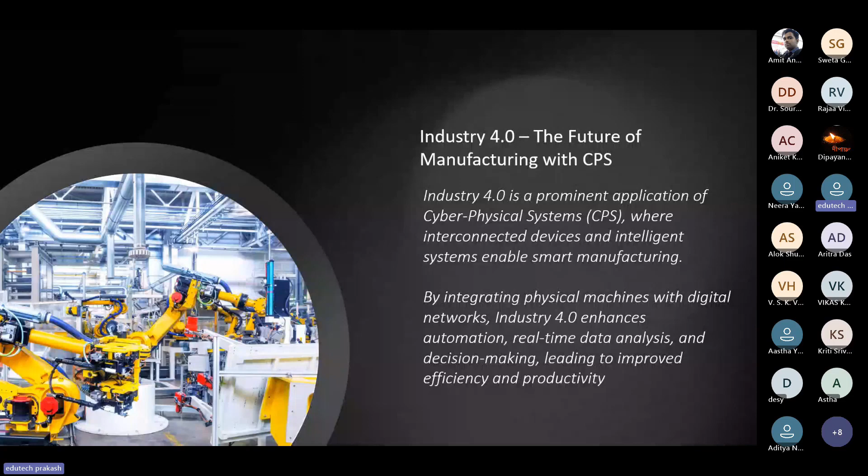So I'll slowly touch on different types of robots and how you can do research on CPS, what concepts you can cover. As I told you, I am from EduTech, and we are also offering the CPS lab where we will help you set up hardware like a mobile robot, a robotic arm, or a self-driving car, indoor or outdoor, and also the drone, aerial autonomous vehicle. I'm going to touch upon research closely with our components, because we're also doing research with some institutes, and we offer this lab to all IITs, NITs, and Tier 1 institutes.

So first, we cover the computation part, or we can say think. When we talk about computation in the first application, smart factory, one key robot in that smart factory is the robotic arm. In the robotic arm, we need to do sensing, meaning you need sensors to see and understand things, or we can say think.

In this video, you can see the robotic arm and its digital twin. Both the digital twin and the real hardware are synced to each other, meaning all the joints and encoders can collect data and send it to the cloud. From the cloud, you can receive it on other devices and replicate the same thing in the digital space. Parallelly, on the left side, you can see the robotic arm with the RGBD camera, where you get RGB color image and the depth image.

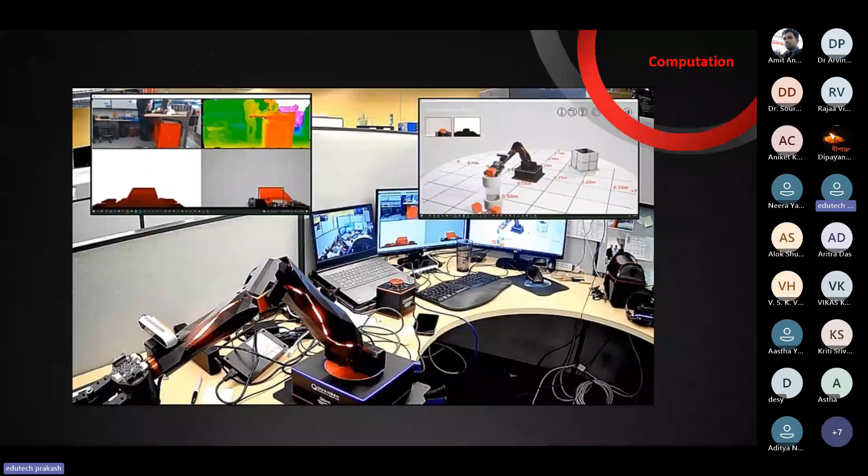Next time I need to do object segmentation. In this case, one object will be a circle and the other will be a square. For this, OCR is not suitable. You need a different algorithm to identify this, converting the color image to black and white, then edge detection, and from that you do some calculations. Only then can it identify whether the object is a square or circle.

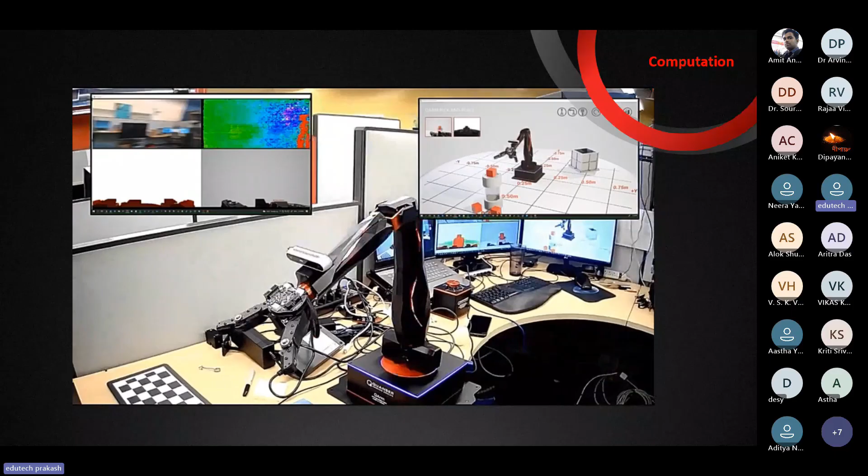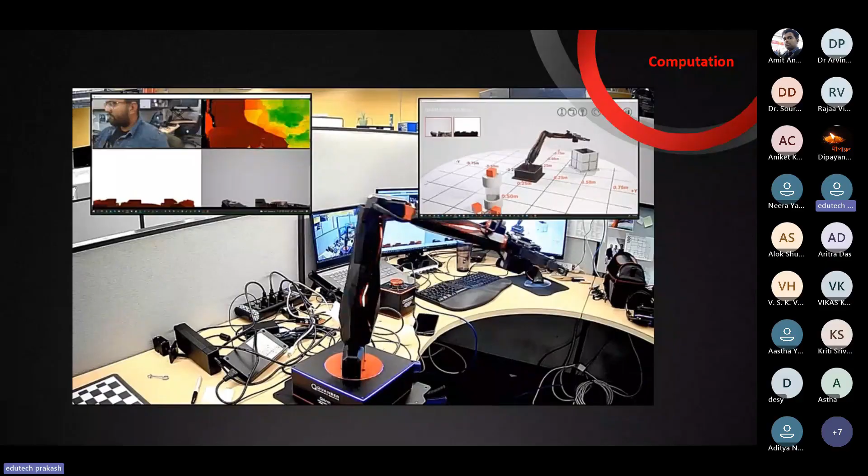Using histogram data, you need to do all the calculations manually. But with an AI algorithm, the same DNN algorithm can be used for different types of samples. Today it's just boxes, tomorrow it may be a vehicle, a car. For example, you need to fix the nut and bolt in the seat, so the same algorithm can be used.

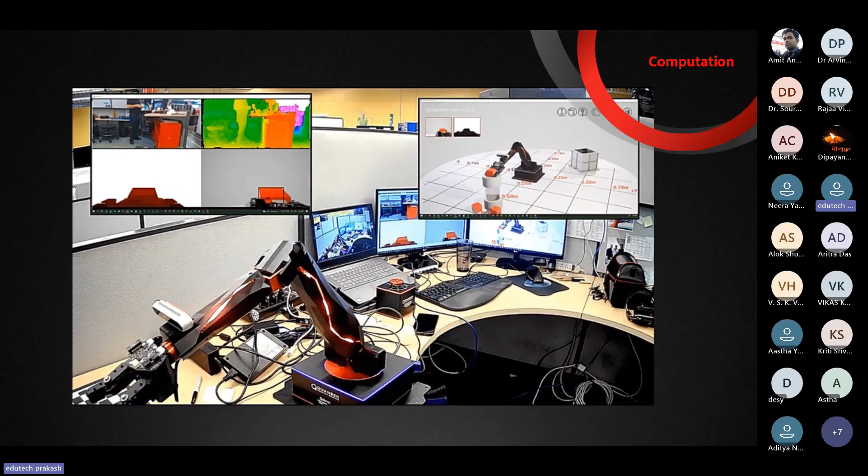That's how people are evolving their technology in the industries. Mostly the algorithm will be similar, so a small configuration is required instead of swapping the entire program.

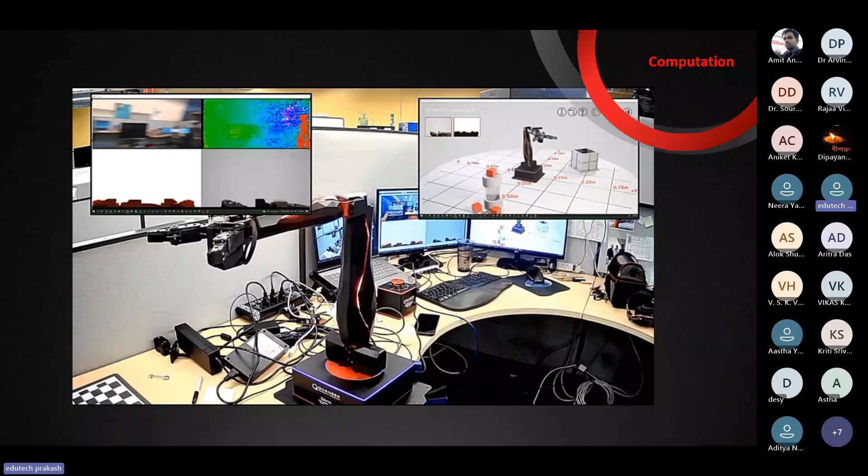As in the previous example with the robotic arm, this time it's a drone. In a warehouse, the drone is used for surveillance and data logging. It will go to the warehouse storage area and scan all the labels. It can pass the data to the cloud, and you can track all in and out activities, monitoring them through the drone. So for this case, how can you do the research?

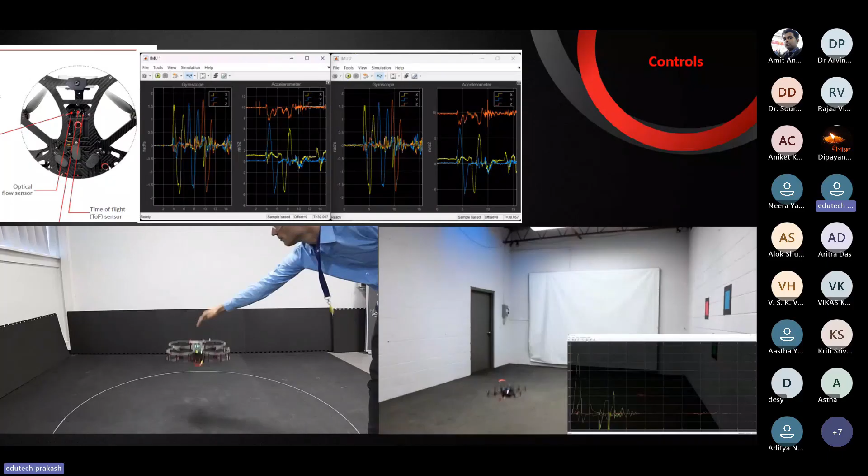This is one example of external noise made by a human, or even in MATLAB Simulink you can simulate noises like environmental disturbances. You can use the environmental model to give a disturbance like wind or other disturbances - you can give that option.

On the right side, you can see the stability - what level of stability we can achieve. So we are going to do a backflip, not only one time - we are going to do triple or four times backflip within 5 seconds. In this video you can see this. This level of stability you can achieve with our solution.

If you're doing research on controls, the concepts you can cover include starting from the basic mathematical model of the devices, and the motor model. From there you can identify the suitable parameters for the control, and you can change the control algorithm - it may be feed forward, feedback, PID, LQR, state feedback control, whatever it may be. You can change the algorithm and validate it.

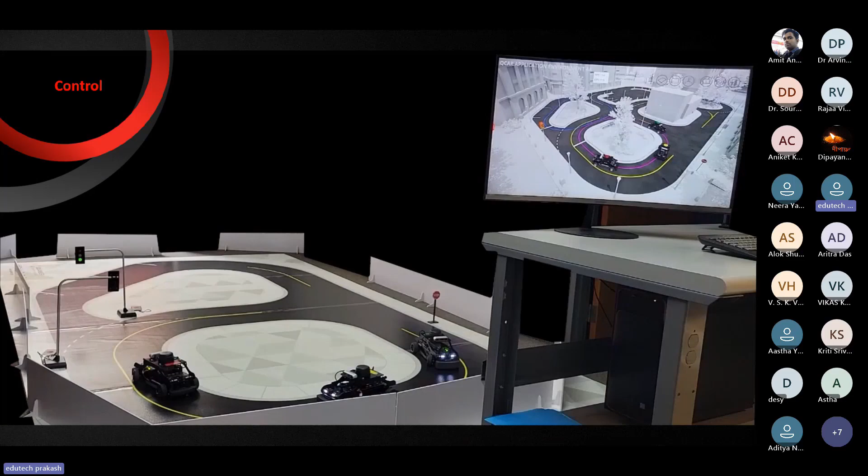And also the indoor 1/10 car - here we are, this is the car, with a smart map. Here you can see the smart traffic light. It can detect the traffic and it will open up the particular lane. Like if there is heavy traffic on one lane, it will open that lane and close the remaining lanes.

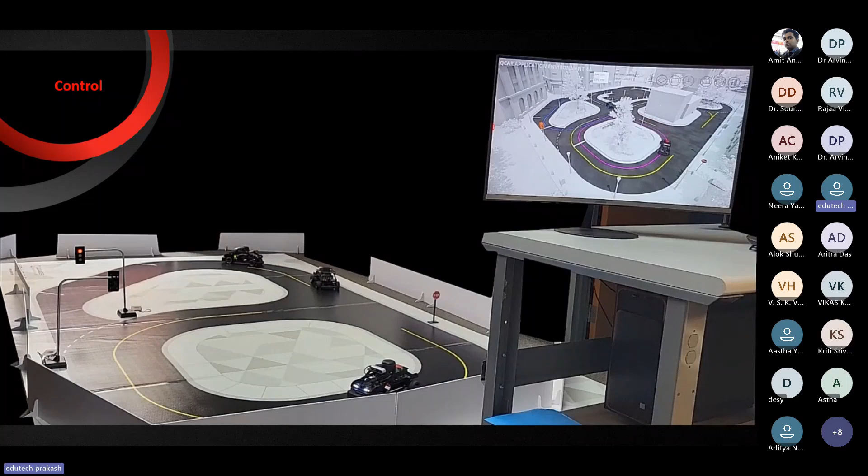This is the smart infrastructure, where all devices and all cars can communicate with each other. Each car knows the current location of itself and the remaining cars. Similarly, the traffic light also knows all the data - if there are four cars, it knows all four car locations nearby, and depending on that it will open up the traffic light. On the right side you can see the digital twin.

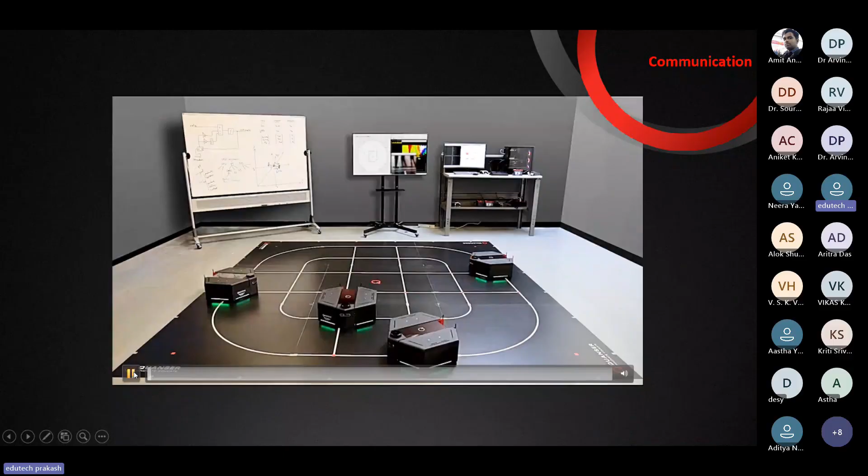And the final part, we already completed the computation controls. Now it's communication. When we talk about communication, this is one example where industrial robots and warehouse robots should navigate multiple obstacles, and all devices should be connected internally, either as a mesh, centralized, or decentralized.

You need to communicate all the data. If there is an obstacle, if you're going to apply brake, you need to share this data - what is your current status, your bot and the remaining bot - the way you can develop the algorithm for the communication.

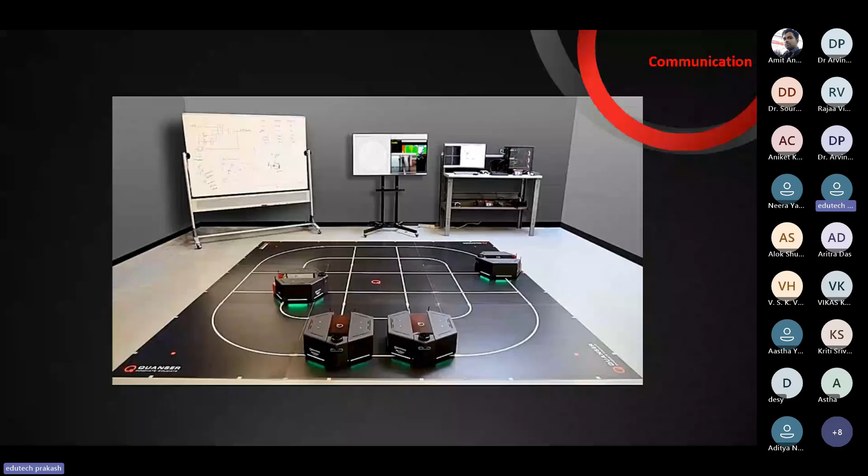This is for the mobile robot, and this is for the drone. With our drone, you can do this swarm intelligence, like all four drones can do a single operation with the same trajectory.

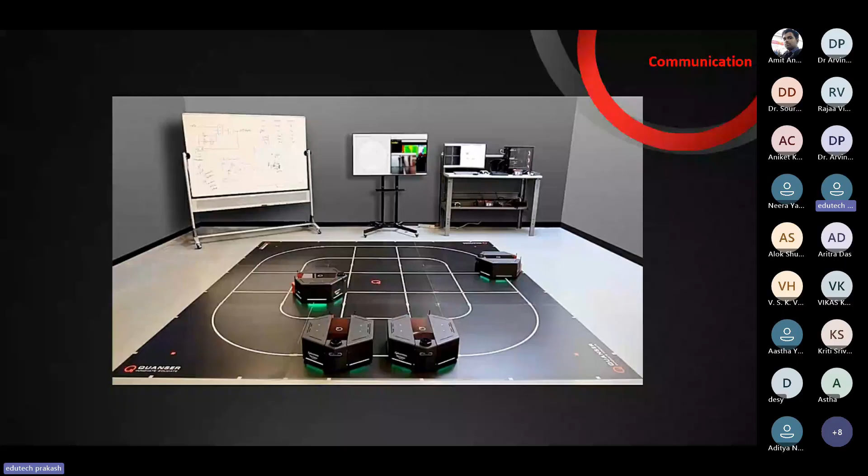This means it is not manually controlling. All drones are automated. In real time, they can do that computation, they can do controls, and finally they can do the communication. And this is for the architecture.

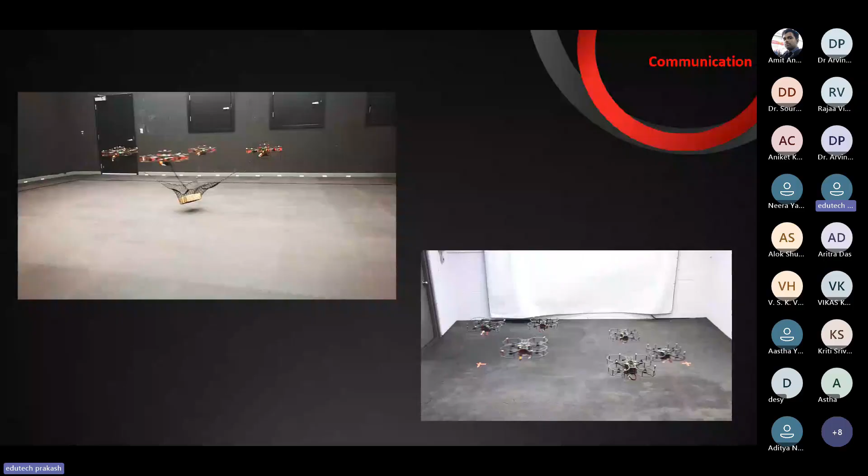At the same time, you can do both manual control and object tracking, and this is how the data communication works. Each drone has its own stabilizer with the NVIDIA board, and all devices are connected through the same Wi-Fi network.

So from my ground station, my laptop, I can pass the waypoint so that all drones can follow my trajectory.

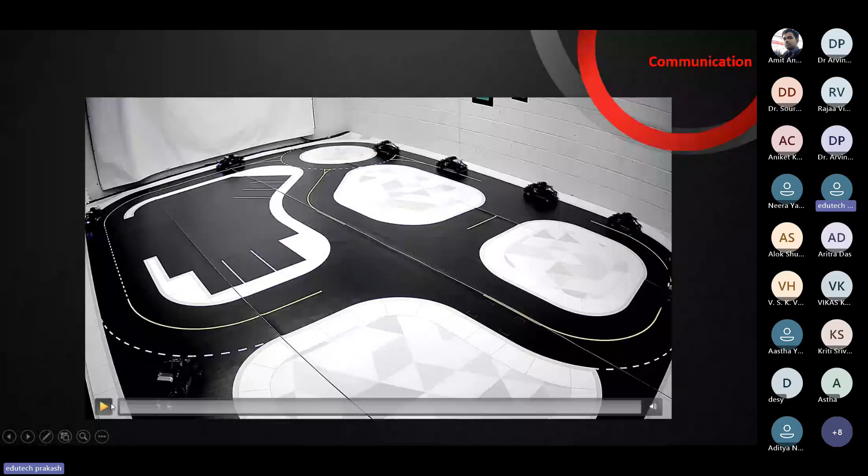Similar to the drone or mobile robot, what will happen if we run 10 smart cars? When people talk about autonomous trucks, in industries goods transportation happens through these types of trucks, meaning 10 trucks should follow the particular direction, pick up objects, and drop them somewhere in the industries, or travel through 100 or 200 kilometers.

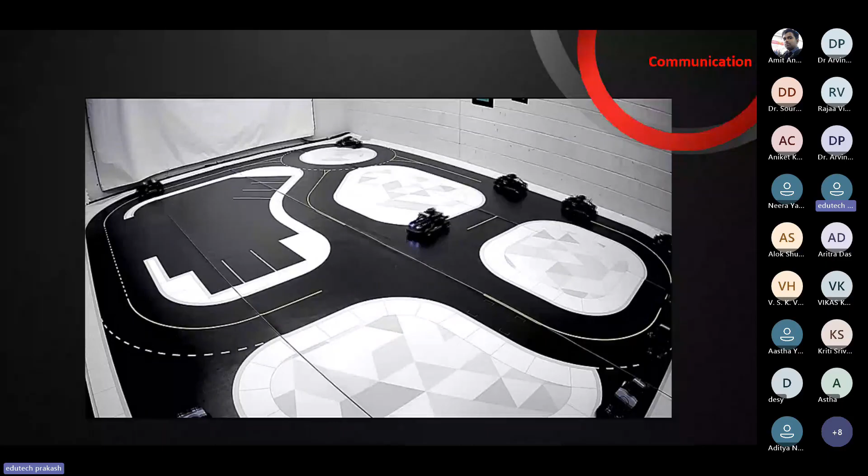With limited control enabled, the truck makes human activity less effortful and more comfortable, so the operator can stay calm and monitor the system.

Just two more minutes. This is what our offering, edutech - we are offering this smart factory example, with mobile robot, robotic arm, and drone for the smart factory, where our drone and mobile robot can communicate with each other, heterogeneously. It can do the master-follower.

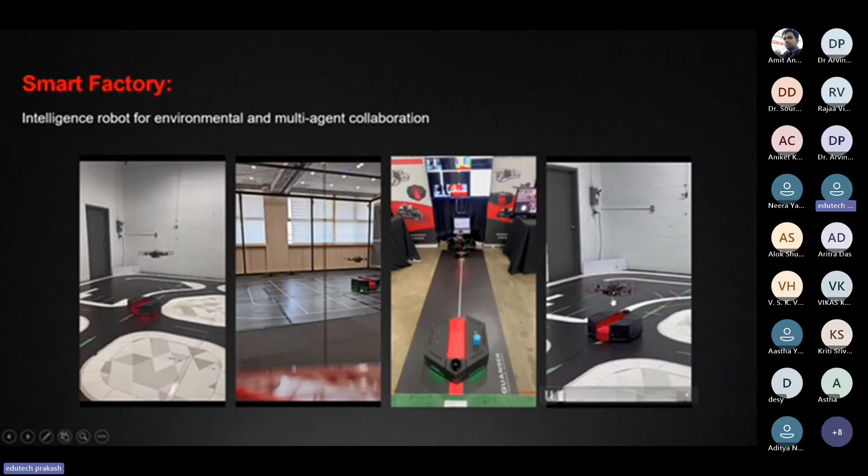So on the right, you can see landing and takeoff from the moving robot. And the same way, robotic arms can also sync to each other. That means, similar to the drone, you can communicate your current position of the bot to the robotic arm.

You can see the robotic arm is sending the data. Whenever the bot receives the data from the arm, then it will change light. Right now, the LED color is green.

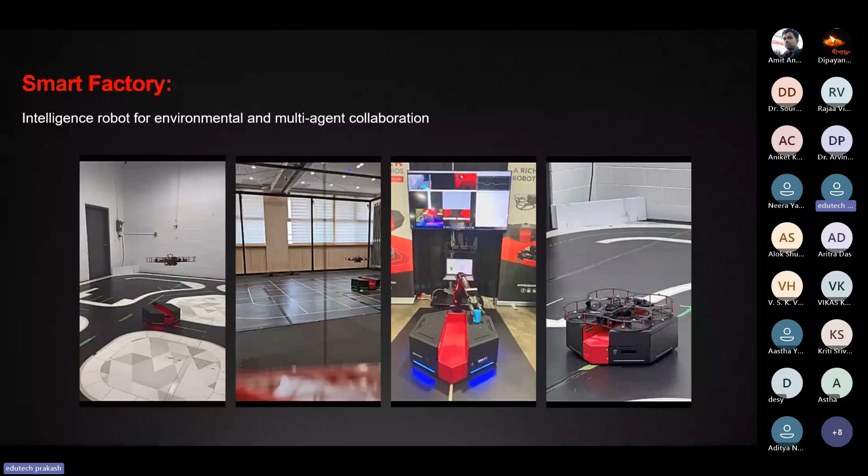So whenever the robotic arm changes its states, the robotic bot will acknowledge that. So it's like a master slave - bot will send the signal, robotic arm will acknowledge, then bot will respond.

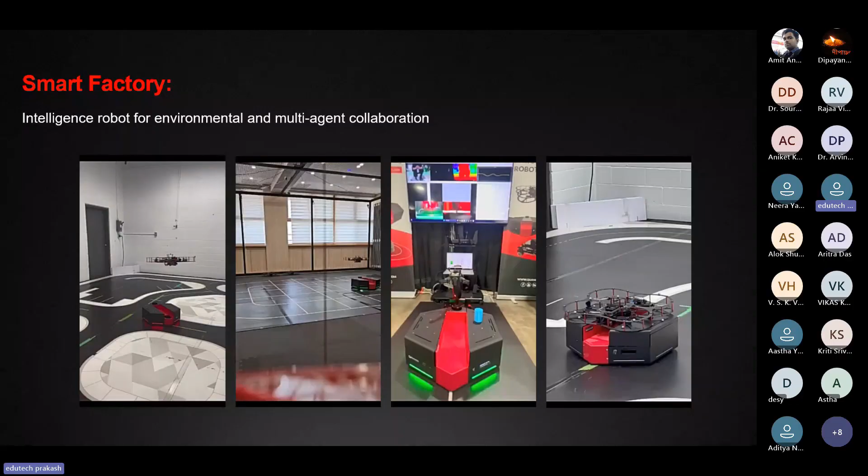The way you can do that smart factory application, or you can use our digital twin and the robotic arm for smart mobility. We are offering indoor cars - so this is what that car looks like. I will quickly go through the research.

Segmentation - instead of doing these things on a real car, which requires following multiple rules and regulations, if you're doing research indoors, you can simply simulate this in the lab itself with our indoor car. You can do all types of research, and later you can use the same model with some level of tuning on the real car.

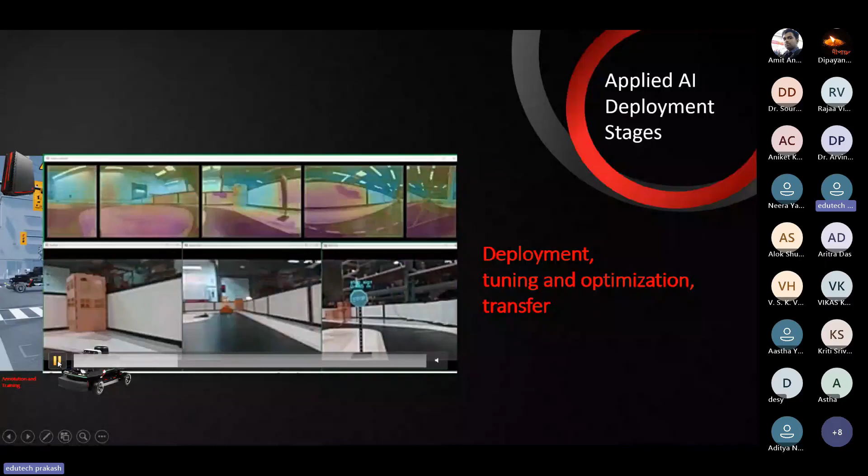From Northeastern University, they are doing research with our indoor car on cyber physical network analysis and design, and applications like cloud-based systems, smart energy systems, autonomous vehicles, biological networks, and a few more academic institutions from Canada.

So these are all the outcomes from this - you can do research, you can do publications, and also you can attend conferences.

How your AI algorithm will navigate this dynamic scenario - you can develop your research and publish it like this.